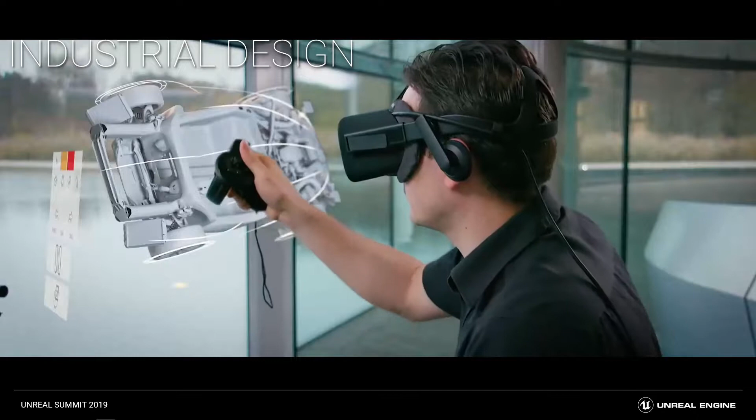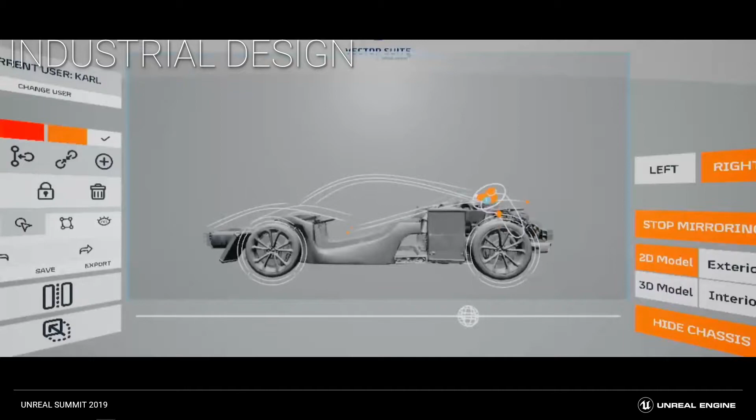One of the other benefits of that technology is that it allows you to export wire format that can then be imported into Rhino or Alias Studio Designer. So it's really part of the process, and it really helps optimize the design processes and industrial design for the designers.

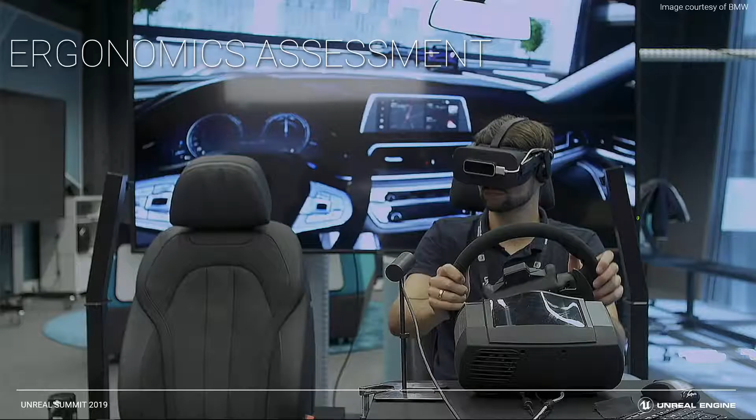So of course, if you can use it for exterior design, you can use it for interior design because it's pretty similar. But if you are doing interior design, then it's interesting to talk about ergonomics assessment. Because if you are designing a product, it might be interesting to be able to try it even before you manufacture it. Being able to quickly iterate over new ideas without the need of developing and manufacturing a prototype, which is very expensive, is really something that is convenient.

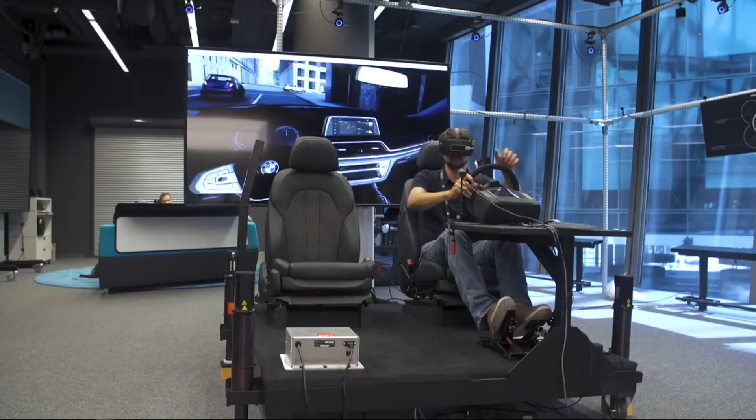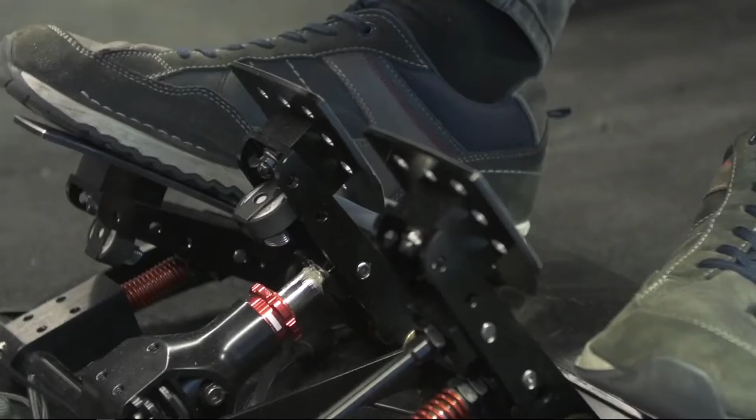In this example, we have been working with BMW to create interior design and see what the impact is on ergonomics. With the number of screens that have been added into the car, the number of interacting dashboards in the cockpit, you have to ensure that the driver is not distracted by all of that electronics, and he has to remain available, capable of interfacing with the vehicle commands.

And the main issue that you have is that designers tell you how the vehicle would be in a perfect world, but engineering on the other side is looking at what is feasible to manufacture with the amount of time available. When you combine both, that's where you need a mixed reality platform to validate what's really the impact of design on engineering.

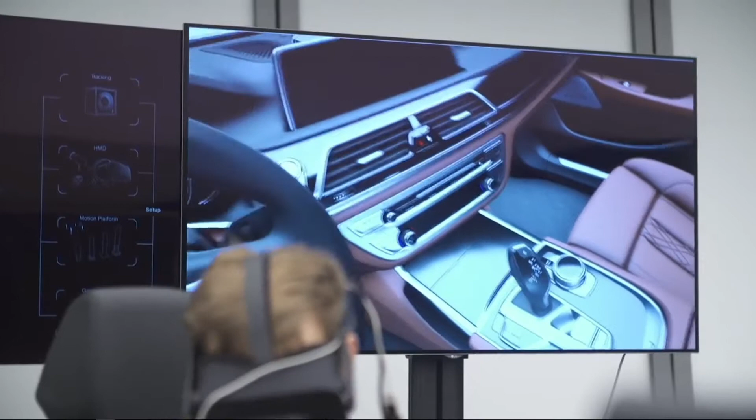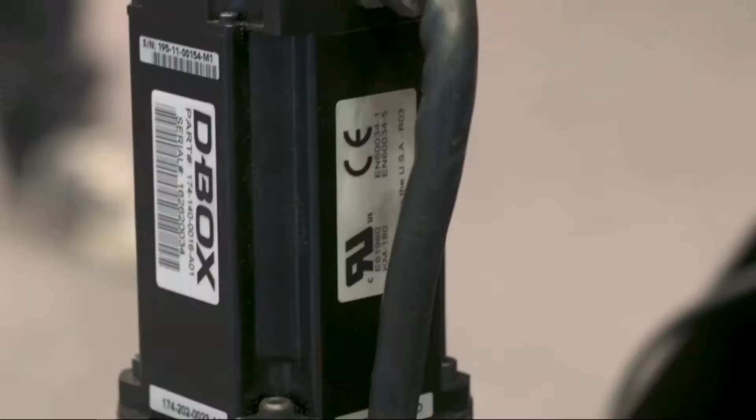So in their mixed reality lab, they have combined hardware such as an HMD with a D-Box motion platform. By doing that, they can really reproduce the experience of the car. And then they use Leap Motion and sensors that they can interface with the touch display of the car, and really operate the car's interactive system as if it was in the final product.

Using that digital twin, they can really assess the changes of design on the fly. They can reduce the development cost and time while finding the best solution for their customers.

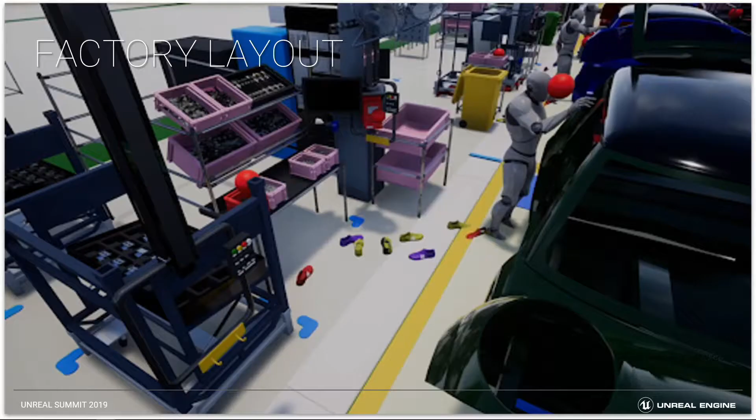If we continue around the use cases that you can apply for manufacturing, then we can talk about how you are manufacturing them. Because if you're designing new products, you're going to have to build them at one point, and that implies the development of factories. Unreal Engine can really help you on two different use cases here. The first one is on process simulation and planning, and you want to answer the following question: Can I build the products? Can the workers or the robots assemble it? Can I train the worker before the factory is manufactured to improve their productivity?

The other important use case is factory layout design and operation scheduling. Can I optimize the processes of my factory so that it is more efficient, and do that before even I manufacture and build the factory?

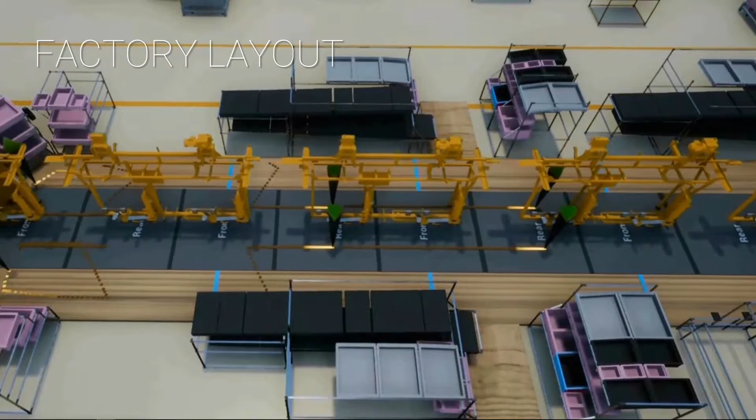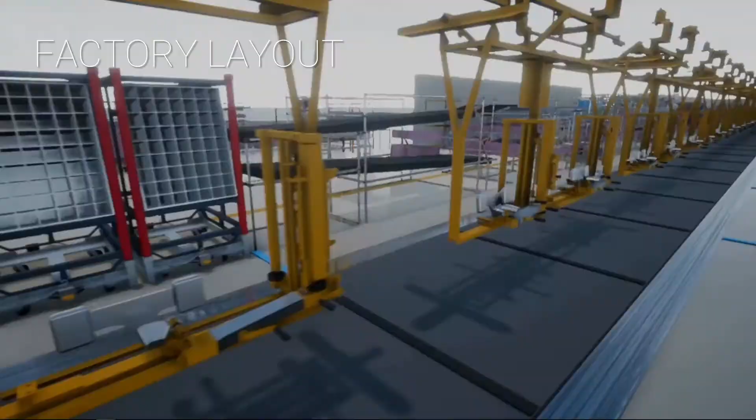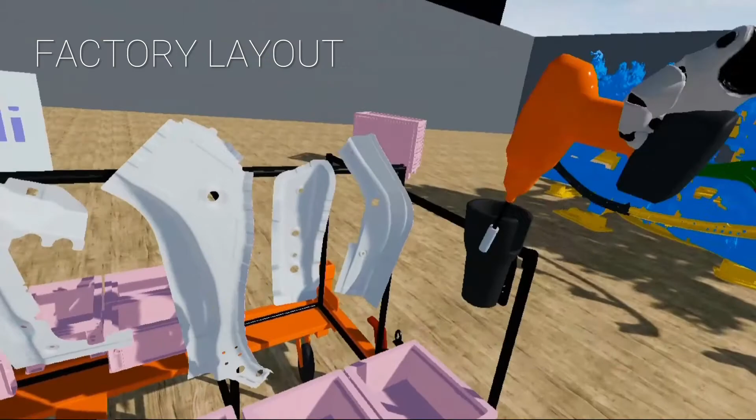So again, this is an example that we have been working on with BMW, for their new mini factory in the UK. They have developed a virtual representation of their factory, and they have basically modeled all the assembly processes within the factory to understand, communicate, and optimize before even building the factory.

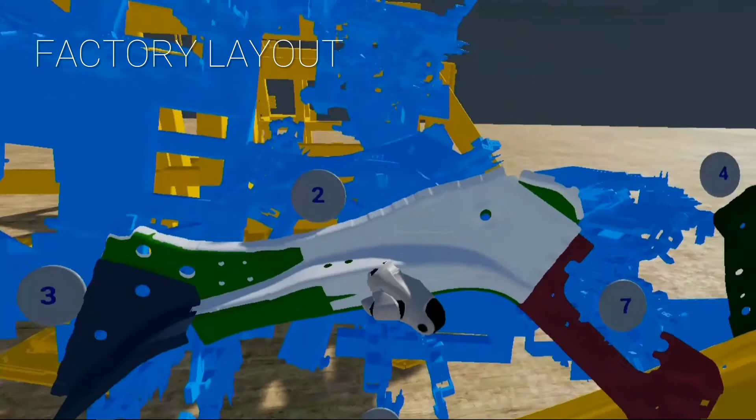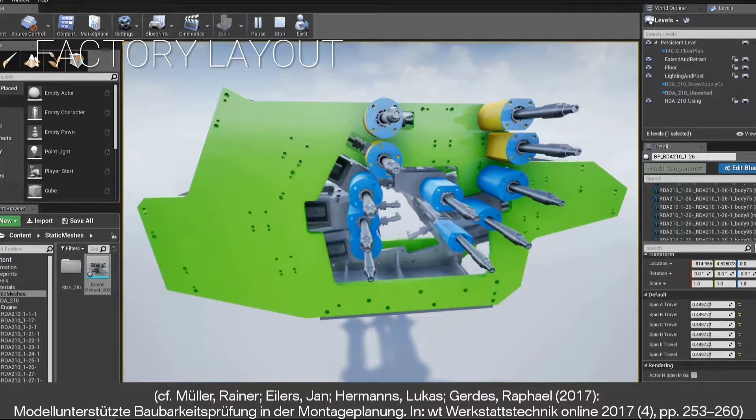So with this digital factory, it enables the design of better assembly procedures, but it also helps identify conception issues, as all the processes are not only documented on paper anymore, but also in 3D and animated over time. That enables everyone involved to fly around, understand the representation, and really grasp what they are developing and manufacturing. And because it is all done in real time, the changes that they want to apply can be experimented with quickly. They don't have to wait for a big turnaround or discover the issue once the factory is completed.

So after the factory, and once the products are manufactured, in parallel, you want to talk about digital marketing. When we talk about digital marketing, we want to talk about all the imagery that is required for a new product. Because when you manufacture a new product and you want to release it, you have to address all types of communication channels: print channels, online channels, TV channels, and even more these days.

So we've shown this morning an example of our real-time automotive advertising platform done with The Mill and Chevrolet for the new Camaro. It's called the Human Race. But there are other ways that we can improve and implement Unreal into those procedures.

In this example from Audi, they have to deal with all the options around the product being developed and made available to customers. The product catalog that contains all the possible options of a vehicle is called the 150% model, and that reference model is used as a central point for generating all the imagery for marketing. Unreal Engine enables storing all product variations in a single model, so marketing departments and agencies can quickly generate beautiful content on the fly, switching all possible configurations and environments.

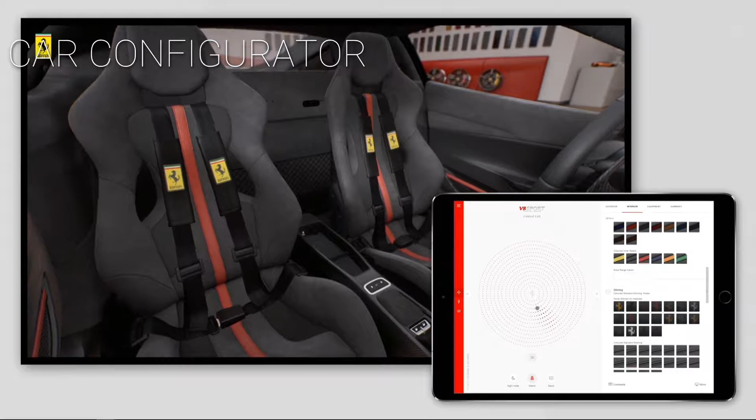As we've seen, Unreal Engine is really changing the way manufacturing is done, helping optimize the entire product life cycle. There are of course many other use cases we could talk about. We've seen Unreal Engine used in mechanical engineering, in CFD simulation, and there are even now people integrating Unreal Engine directly inside the dashboard of the car to be part of the entertainment system.

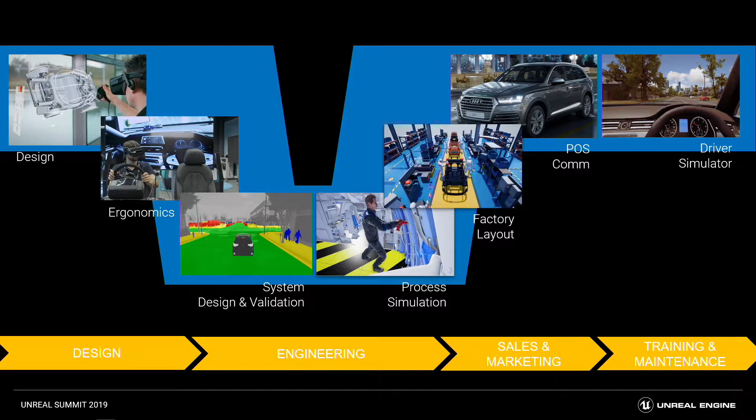So there's a lot of future for Unreal inside the manufacturing sector. But there's one use case we haven't talked about that is of great interest for Epic Games today: autonomous vehicle simulation. More specifically, we're going to look at how Unreal can help train and validate the autonomous pilot agent - the brain that drives the autonomous car and makes all the decisions.

One of the main challenges of developing autonomous vehicles is that you have to test them, and testing requires huge infrastructure. Even then, it's not really possible to reproduce all driving conditions in a deterministic way - you have no control over the weather or many events happening outside. If you want to reproduce test cases, it has to be done deterministically so you can measure improvement and performance. Another important aspect is testing the vehicle before going on real roads to avoid problems. All of this is very costly, time-consuming, and doesn't scale up.

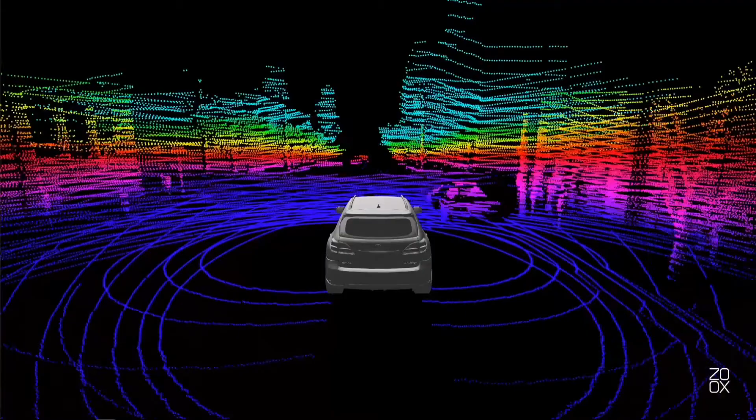There's another reason this project is very interesting: Zoox really wants to understand the impact of the changes they are making. This is why they use a real city—once they run the simulation inside Unreal, they can go into the streets and measure the changes and the performance of the design. That provides a very easy way to measure improvement.

As you can see in the video right now, all the sensors of the car are simulated—the LiDAR, the camera, the proximity sensor, everything is simulated as in real life.

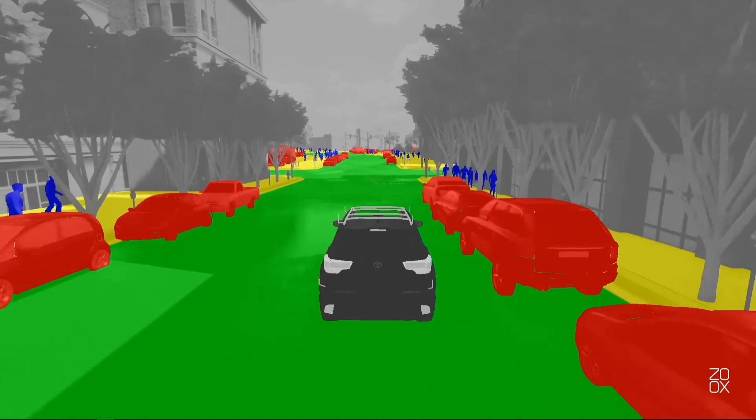Another benefit here is that because the computer generates the imagery, it is able to tag automatically. So when training the agent—because this is the other part of the process, not just validation, since this is based on deep learning techniques and you have to train—they can automatically tell the computer: this is a road, this is a car, this is a human. That helps develop the proper behavior of the AI agent.

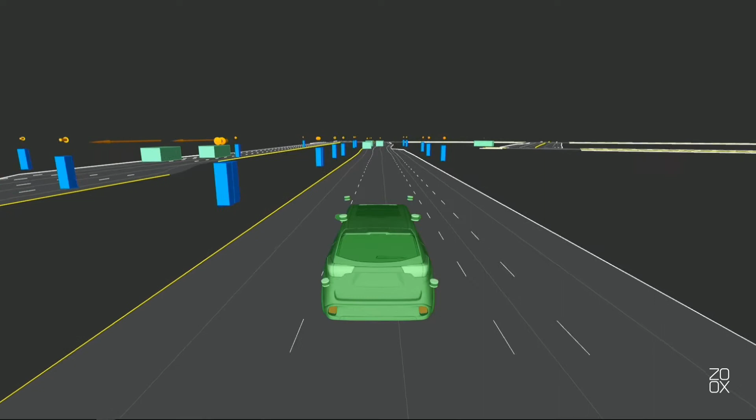So how do you develop such simulation in Unreal Engine for autonomous vehicle development? The first aspect to cover is vehicle dynamics. The physics engine included in Unreal Engine, PhysX from NVIDIA, is not suitable for creating high-fidelity simulation, so you need to use engineering software specialized in vehicle dynamics.

There are two strong partners that Epic is working with. The first is Simulink, developed by MathWorks. Simulink has released a software called Vehicle Dynamics Blockset, a library of pre-assembled vehicle dynamics models for cars and trucks. The benefit of that solution is that it comes with several scenes provided for Unreal Engine, made for testing advanced driver assistance systems (ADAS) as well as analyzing vehicle ride and handling conditions. It allows mechanical engineers or simulation engineers to really simulate the exact behavior of the vehicle with engineering-grade values.

Another interesting partner has developed CarSim, by Mechanical Simulation. The difference is that CarSim uses empirical vehicle models, meaning they have measured vehicles in laboratories and generated models of these vehicles for Unreal Engine. With the CarSim tool, you can also generate simulations and connect Unreal Engine into the simulation to create closed-loop systems, to validate, for example, driving behaviors.

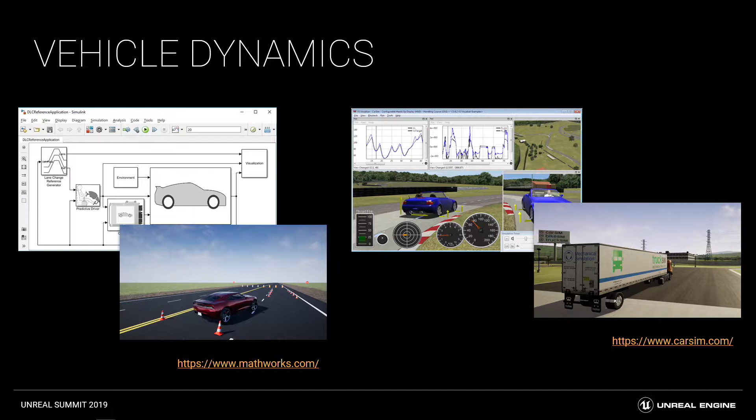Once you have your car dynamics, you have to create the terrain and the road networks. And here as well, we have some interesting partners to work with. We have TrianGraphics from Germany, Esri from Switzerland, who is one of the leaders in GIS systems.

Esri provides a tool called CityEngine, and the benefit of this software is that they can ingest GIS data from the real world and help the creation of real cities. They use satellite imagery and city data to get proper elevation, building information, and road networks. The benefit of TrianGraphics and Esri is that they all integrate with Datasmith, so importing terrain data into Unreal Engine is very easy.

There are also products like Vector Zero that provide plugins directly into Unreal Engine to develop road networks.

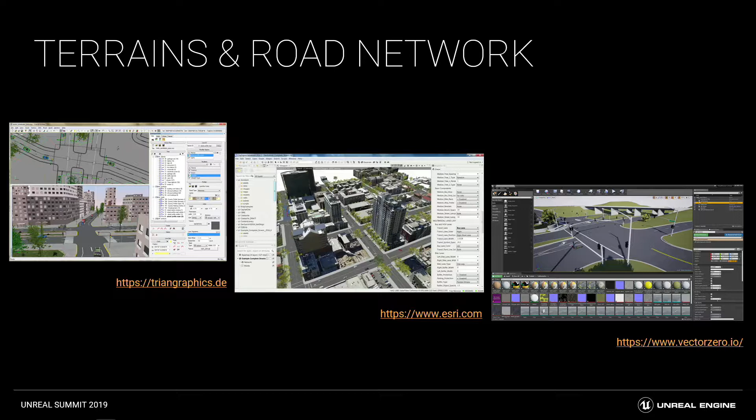Now, in some cases, because of the deep learning algorithms used for autonomous vehicles, it requires a lot of data—not only real-life data, but also cities and places that don't exist. Creating such data by hand is very expensive and laborious, and in fact it doesn't scale. It's nearly impossible. So the best way to deal with these challenges is fully synthetic data that is created completely automatically. There are service providers like AI Reverie or Parallel Domain that specialize in creating very large environments fully automatically.

The benefit of these environments is that they are properly tagged so that the agents, as part of the deep learning process, can easily understand and identify what each part of the environment is.

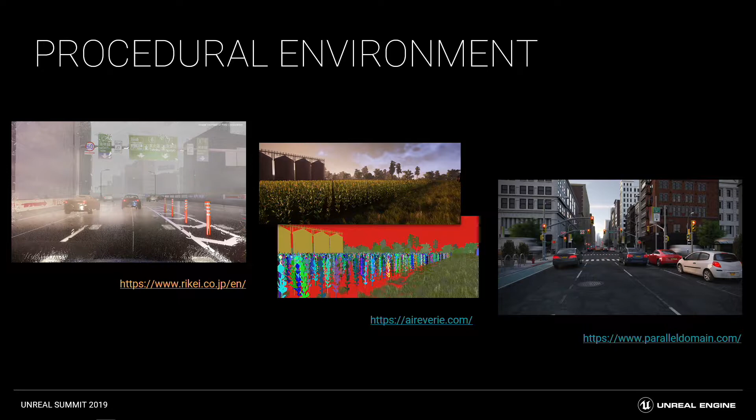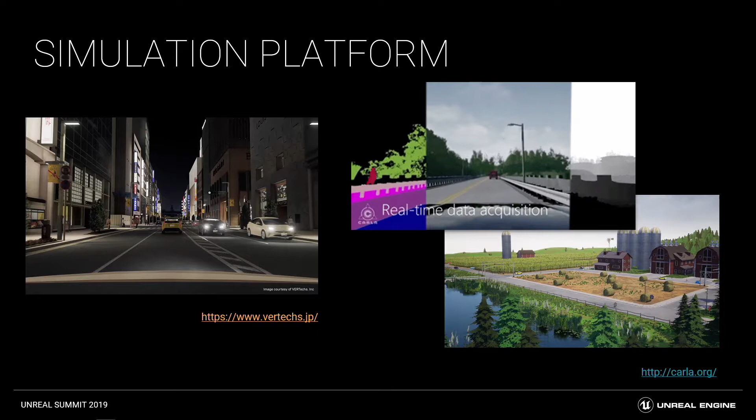So we've looked at the beginning at all the core features that Unreal provides in general that are very beneficial for enterprise markets. Here, I would like to look at some very specific features that were developed to help manufacturing end users.

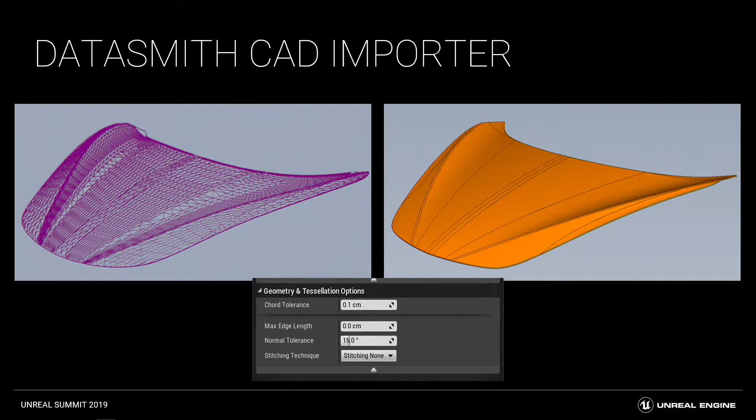Of course, importing the geometry is important, but manufacturing data includes much more than that. For example, you have the entire product catalog. To give you an example, a car model today is typically made of between 7,000 and 10,000 pieces that we call parts. If you look at an airplane, typically just for the nose of the plane, the front part and the cockpit, you are talking about 50,000 parts. So these are huge amounts of data that you have to ingest, and this data is very well organized with big hierarchies and a lot of metadata.

That's another benefit of Datasmith: it can ingest all that data and convert it automatically into Unreal Engine assets, so that you can then work with the data the way you want.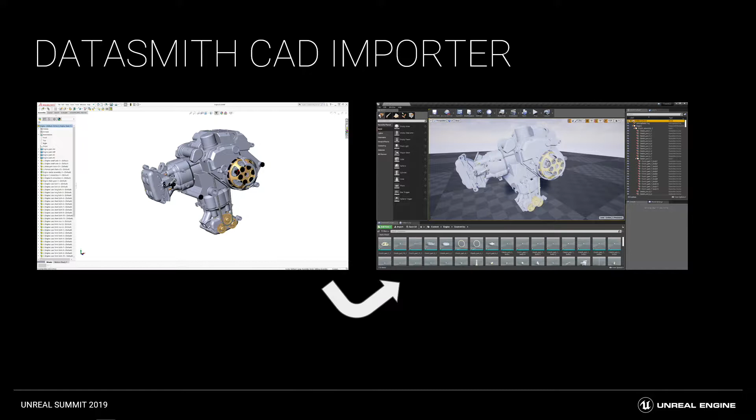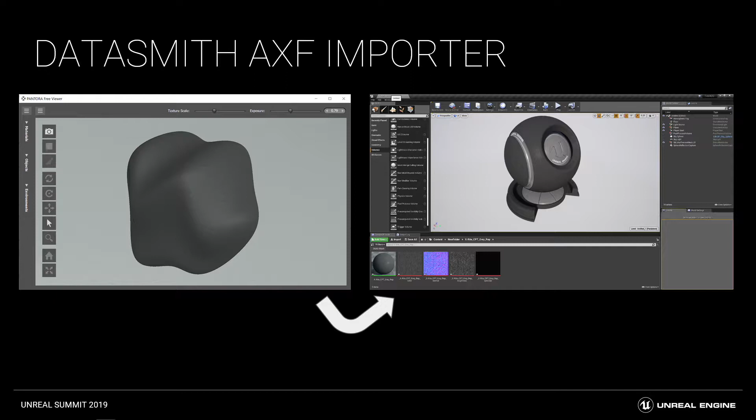It is important to mention that Datasmith also supports formats like NVIDIA MDL or X-Rite AXF. These are material formats used by engineers and designers, generally generated from scanners that capture the proper BRDF of the material, or coming from libraries provided by material vendors, like BASF for car paint.

Import and tessellation is really the first part of the process. What happens after that is you have a huge amount of data, and that's not good for real time because the engine has way too much information to render. A typical game will deal with maybe 1, 2, or 3,000 draw calls, objects to render on screen. Here we're talking about 10,000, if not more, parts. So you have to use tools to prepare the CAD data so it can run in real time.

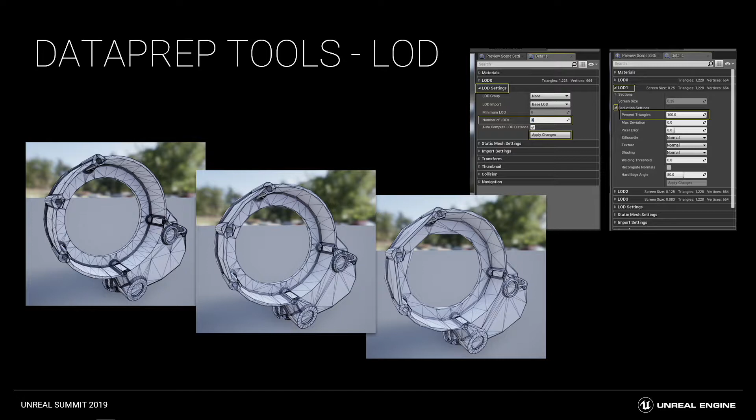The first data prep tool we use is called LOD, Level of Detail. It's a well-known technique in computer graphics, used heavily in games. What LOD does is allow you to take one single part and generate variations of it with different levels of fidelity by reducing the amount of triangles. It's a very effective way to improve performance when objects are not close by or heavily visible on screen. In Unreal Engine, we added a tool in the static mesh editor that automatically generates all the levels of detail for a single static mesh.

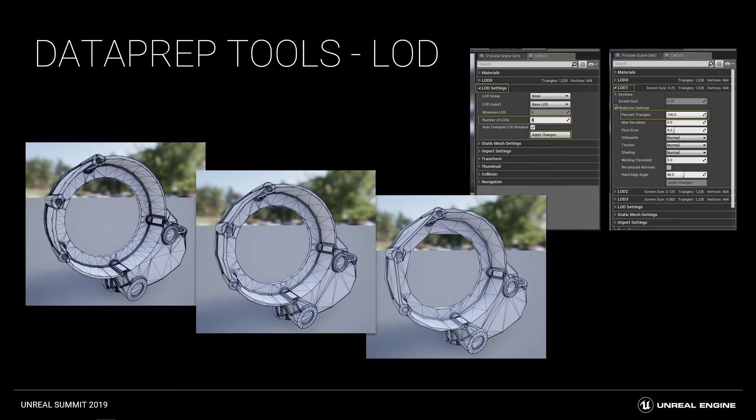The second tool we added inside Datasmith and Unreal Engine is actor merging. It's a simple technique where you take multiple static meshes and combine them, merge them into a single actor, reducing the amount of draw calls, the amount of objects you have to render on screen. Typically, you use actor merging when there's no need to manipulate parts independently, when you know some parts will always be used together and glued together.

Another interesting tool is Proxy Generation. This is somewhat similar to actor merge, where you take multiple parts, multiple actors, and combine them into a single one. But on top of merging the parts, the proxy tool also does a remeshing or retopology operation. So if you have multiple actors with different materials, the remeshing will regenerate a new material that includes all the others. Not only does the proxy geometry reduce the number of draw calls, it also reduces the number of triangles. That's very practical when you have elements where complexity can be easily reduced, for example with an engine, as in this case. Proxy generation can also be combined with LOD together if you want even further optimization.

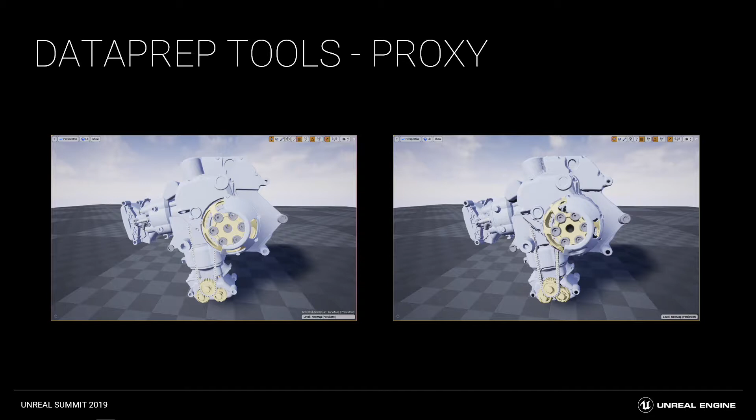Another interesting data prep tool is called Defeaturing. As the name says, Defeaturing allows you to remove certain features or properties of the geometry. For example, in this case we have holes that have been automatically filled, and openings that were automatically closed. The benefits of Defeaturing are that it can remove holes, bumps, fillets, and chamfers almost automatically. So when doing a product configurator and you want to visualize a nice part, most likely the assembly parts hidden under the car aren't required. Using Defeaturing is a good way to optimize those parts because they're not really adding value to the visual fidelity of the model.

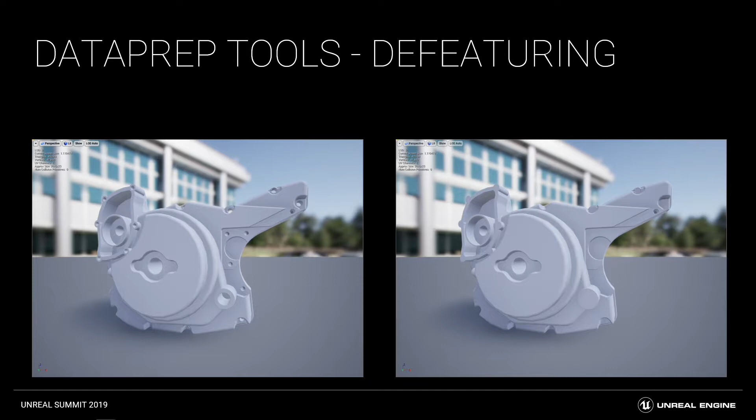Finally, the last data prep tool is called jacketing, a very powerful optimization technique. Basically, it finds in an assembly all the parts that are not visible from the outside, allowing you to detect everything inside the model that you will never see. In this example with an engine, there are a lot of parts inside that you most likely will never see if you're doing nice imagery. In that example, we start with 542 meshes total, and half of them are not visible. The jacketing tool discovers those parts automatically and offers multiple options: tag them, move them into a different layer, or simply delete them.

There are a lot of options, and when you import a very complex model, it could take a very long time to optimize. If you're working for an OEM, most likely, as the model changes every day, the same operation would need to be repeated, because in a factory or manufacturing environment, the processes are very well defined. And if on top of that you have a very short turnaround, sometimes needing to visualize the model the same day or the next morning, you need to iterate as quickly as possible. This is why we added Python scripting inside Unreal Editor.

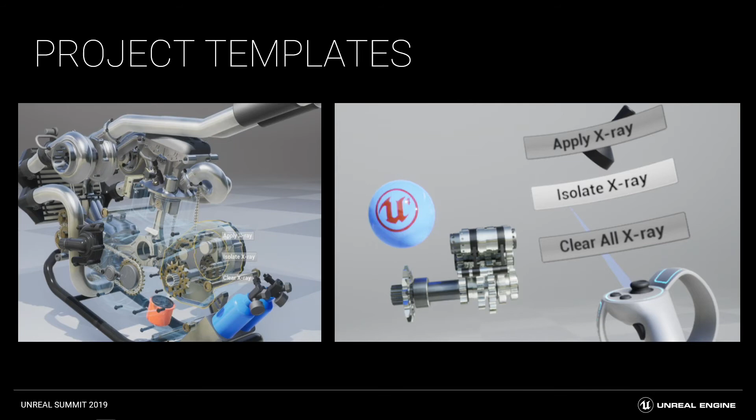Finally, when you are in an enterprise environment, you want proper support and training. For that, we have developed an entire product line of different systems. First, we have the Unreal Developer Network, or UDN, where Unreal Engine developers are available to answer technical questions. We also have a team of technical account managers in almost every country who are Unreal experts for manufacturing and can help deploy projects at your site.

We have an online learning management platform where you can access all the training material, documentation, and tutorials. We also have trainers that can go to your company to deliver dedicated training. And of course, we have our Unreal Academy event—the next one will be early June at Epic Games HQ in North Carolina.

As we've seen today, Unreal Engine is already used by a lot of manufacturing industry because it is performant, flexible, and supports all the open standards and provides source code access. We are still improving the features, and there's a lot more to come. There are manufacturing companies all around the world with different experiences using Unreal Engine in design, marketing, and simulation. If you go frequently to the Unreal Engine website, we are frequently updating the story and showing more examples.